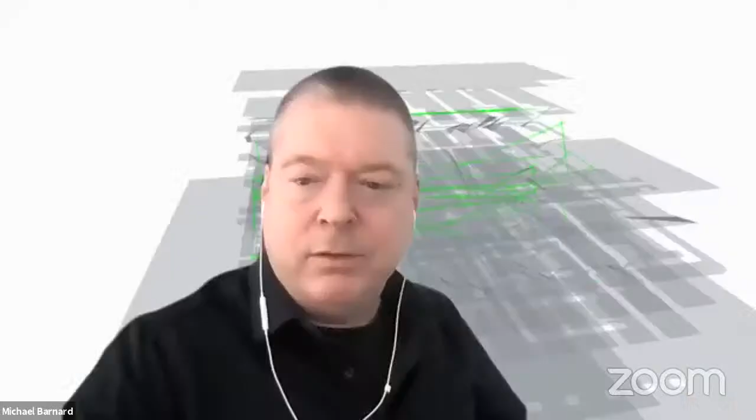Okay, so I expect you'll have something to say to each other, but let's start off with the hardware first, shall we? Look at the construction materials, and if we drift over to the social side, that's okay with me. I'm a sociologist. Can I start with sharing a screen to set a thesis? Sure, okay. Just find the screen, there it is. Paul and I'll go back with different pictures.

Part of my thing is that I came from this, which is the British Columbia efficiency in new buildings space. I was looking at this a couple of years ago at a conference, people were presenting on it, and I had an allergic reaction to it, specifically the net zero new construction. The principle of net zero at the time, and this is a geographical perspective and also a legacy perspective. The first perspective is that I live in the lower mainland of British Columbia, which has some of the worst solar power generation capability on new buildings in the world.

We just aren't a great place to put solar on rooftops. Because you get too much rain. It's rains and clouds, and we're moderately far north, so it just cuts down on the amount of sunshine that we can use to generate electricity. Right. And net...

Net zero implies that not only do you have a passive home, or a passive building, but you're generating the electricity on site. And I don't think that makes a lot of sense. And more to the point, I think it makes very little sense outside of suburban sprawl models. I'm strongly an urbanist. I'm strongly for more urban density.

And it doesn't make sense to try and generate all the electricity a city uses, all the energy a city uses, in the confines of that city, when cities take up less than 2% of the land mass of the world. Wind farms interspersed with farmland, just fine. Solar utility scale farms can be put on non-arable land, just fine. It doesn't make sense for me to generate electricity locally.

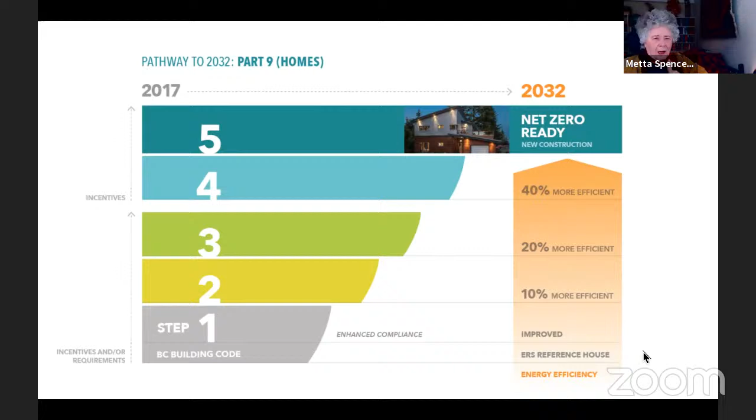Let me get my head clear. When you're talking about efficiency, you're distinguishing that from what? Efficiency to me means anything that saves energy. But you're distinguishing efficiency from what? No, I'm saying that a lot of our efforts, and this chart is very focused on building efficiency, of making passive buildings that require less energy to heat and cool.

Right. And I'm saying that if the energy that's used is very, very low carbon, and it's being used in electrical appliances, building efficiency doesn't matter. Tenant comfort and economics matter, but it stops being a climate argument and starts being an economic and tenant comfort argument. All right. Okay. Next, just two more points in the thesis.

That means that in new buildings, what we care about is embodied carbon more than building efficiency, in my opinion. Embodied carbon: cement is 8% to 10% of our total global greenhouse gas emissions. Sand mined for cement aggregate is the single biggest mining process in the world. And that means that the cement used in standard cement buildings, especially multi-story buildings, is actually one of the biggest carbon debts that's impossible to repay for buildings. And so that's where my focus is. So engineered hardwood construction, which Canada is a leader in, along with Scandinavia, is one of my key focus areas.

The last point I make is that means we have to pay it. I'm very concerned about the legacy of existing building stock. We have a lot more buildings that are already built than we're building new. And so I'm very concerned about what we do with the buildings that we already have, and about making sure the buildings we build have no carbon debt.

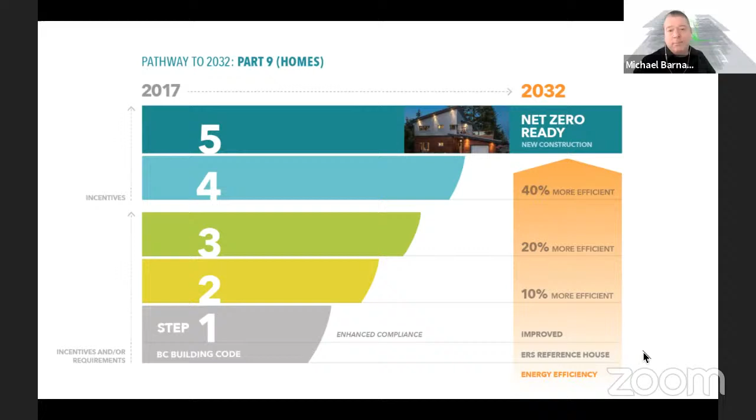So that's my thesis. It was triggered by this. I published a series of articles on that. It led to a bunch of discussion, and it had some changes. We'll talk more about some of these other slides, but I think that's my thesis. That's where I wanted to start the conversation with Paul. And I've given him lots of room to react to. Good. Okay. Are you guys going to go toe to toe, or do you agree already?

Well, thank you so much for launching that thesis, Michael. And I think we will thoroughly disappoint the viewers and listeners in that we're not going to have an argument on this. I am 110% in agreement with you on this. So let's see if I can just share a slide to talk around a little bit.

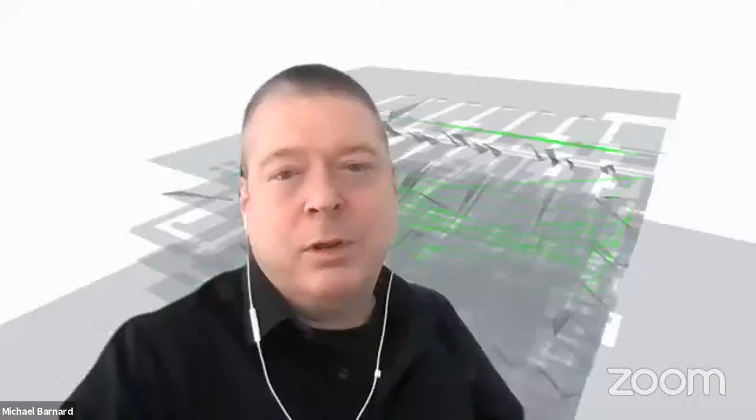Yeah, certainly one of the things I'm looking forward to is getting more nuance around some of these points. Paul is a professional who spends his time in exactly this domain. I skim across the surface and go deep with my nerdy knowledge into domains, but I'm not an expert like Paul is in this space.

Come on, you can do it. I know you can. You know, the blessing of this is, I think it's emerged behind it in your preview as opposed to in mail. So it would open up in a different application. So I think you want to close that down and find the other window to share. Okay, are you seeing that now? Nope. Okay. You might want to stop sharing and share your entire screen. That would be a simple way to do it. I'll do that. You know, the blessing of Zoom is, although this is going live and a few people will be watching it now, the nice thing is I can edit out anything where we have to waste time like this. All right, terrific.

Okay. So to build around your thesis there, Michael, you are absolutely right. Although this new house looks very typically suburban, it's got all those things against what you were just speaking about. It's not urban. It is a large house on a large suburban lot. And it's proudly displaying that it's got an 87% energy reduction. This is a project that my firm completed a couple of years ago.

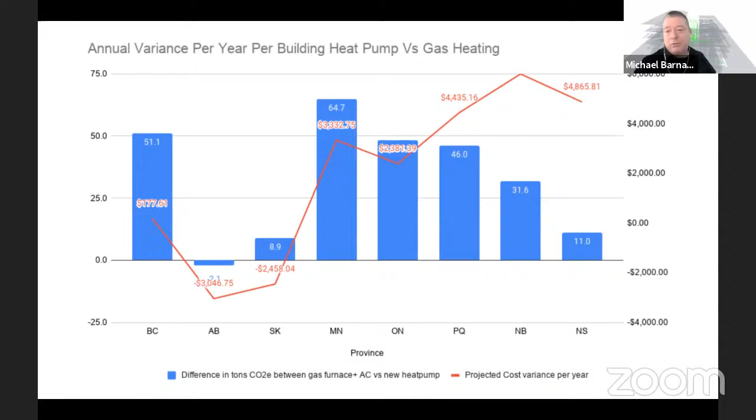As you can see from this chart, even at 2016 grid emissions, with the 2030 carbon price, there's no fiscal case for keeping your gas furnace. You want to get rid of that operational cost and transition to an air source heat pump as soon as possible. And then we save a whole bunch of money.

And so we want to decarbonize everything. The best way to decarbonize everything, that's heat pumps. That's the right choice there. But the building owners are incented fiscally by efficiency, not to put in heat pumps. So we have a gap that we have to bridge. And that's a fundamental policy challenge, which is why I'm pushing this as much as I can from my small position of whatever influence I have as an author, to assert that our policy should shift.

You got to make me smart now. I'm not going to let you go past where I can sort of follow you, but I don't understand why, unless you're saying that some heat pumps are not actually using electricity.

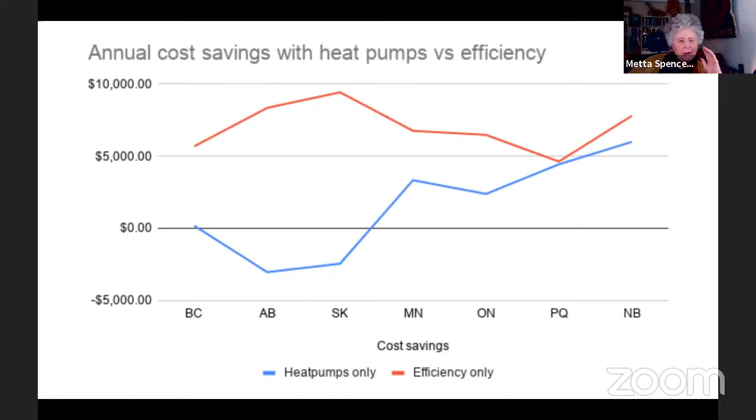Correct. This is the operational cost view, not the transformational cost view. Paul lives in the transformational cost view and has to project the operational cost view. This is the operational cost view. And to be clear, homeowners are weird because they're individuals. They make irrational decisions more often than businesses, because businesses spend more time in spreadsheets.

And so, Kahneman talks about system 1 and system 2 thinking. Most decisions by most homeowners are made in fast system 1 thinking. Most decisions by businesses are pushed into slower, more methodical system 2 thinking. And so, I'm a spreadsheet junkie. I force my brain into system 2 all the time, but I'm irrational as well.

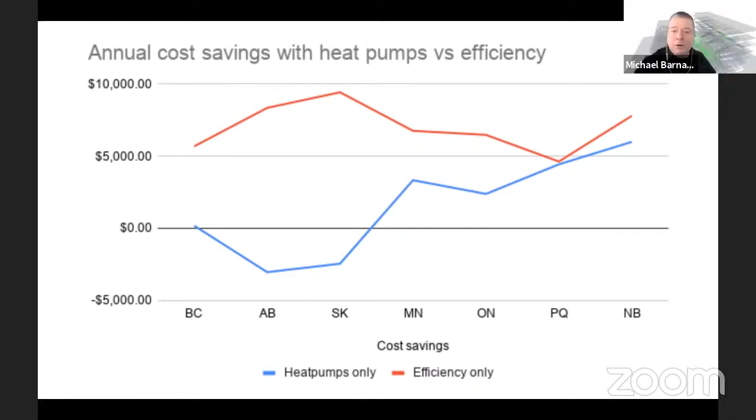Paul, I'm going to stop sharing because I think I've shared enough. What's your perspective on those incentive thoughts and the funding thoughts and the operational versus transformative cost thoughts? Yeah, thanks so much, Michael.

So here in Toronto, Ontario, we are a few steps behind Vancouver, BC. Yes, we have declared a climate emergency, but we haven't put in place any of the other things that Vancouver and BC have put in place. Toronto City Hall is looking through a program called TransformTO at the methods that they would use, and we're looking very closely at Vancouver.

Whether the provincial government of Ontario is looking at anything is an open question. So I'll just leave that alone for the moment. I won't. They canceled the efficiency program at the provincial level as one of their first activities upon entering office, along with 758 renewables contracts.

Paul has to live in that province. I can be a gadfly. You can be a gadfly. Thank you for bringing that up.

You're absolutely correct. And so that's the climate that we're working in here in Ontario. As an individual, I want to do things.

Most of the people that I connect with here in my neighborhood called the Pocket, which is a piece of Riverdale. I know Mr. Hanson very well. Yeah, he's a neighbor. So that means you have to put up with his bicycling stuff even more than I do on Facebook. Yep, absolutely. And community meetings, et cetera, et cetera.

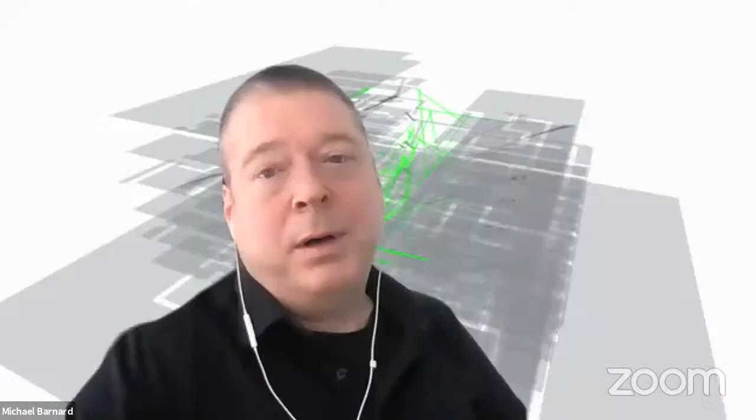Like, it'll take it from working good to working great. And even though I try to preach, seal up your building envelope, insulate it better first, then fuel switch, if you do it the other way around, so long as you do both, it doesn't matter the order you do them in. But to be clear, if you do the fuel switch first, you start saving the carbon emissions incredibly rapidly. Exactly. Yeah.

And I do want to disambiguate one thing. We keep talking about air source heat pumps because there's also water source and ground source heat pumps. So, down in downtown Toronto, they have the deep lake water cooling system. Yeah, what's the name of that company again? Enwave. Enwave, thank you. It slipped my mind. I'm much better with remembering numbers than I am with names. Not a problem. But Enwave runs a pipe into Lake Ontario, a few dozens or 100 feet down, where the water is always the same temperature.

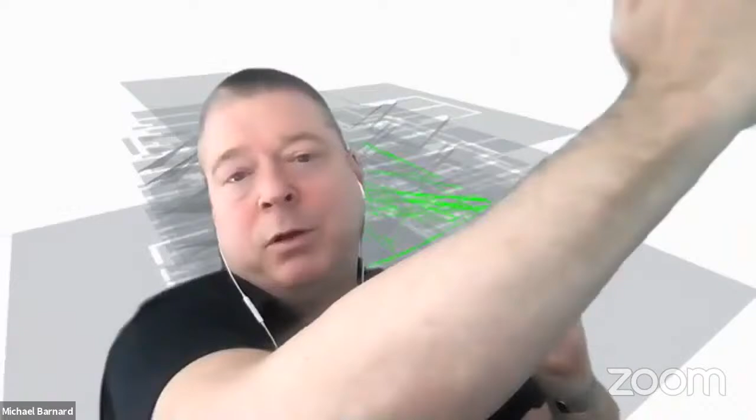And all a heat pump does is it moves heat from one place to another based upon a differential. It's just like an air conditioner. As a matter of fact, it's incredibly similar to that. All an air conditioner does is move heat from inside your house to outside of your house. And so a heat pump is moving heat from outside of your house to inside of your house. And that coefficient of performance, that 3 times, means all you're doing is moving that heat. So you get 3 times as much heating or cooling for the same electricity, instead of a baseboard heater where you get 1 unit of heat for 1 unit of electricity.

Okay, let me see if I'm getting it. So there are 2 factors involved. One is you're switching from gas, fossil fuel, to electricity, which is presumably better. I mean, I have questions about things like... It depends which province you're in. But okay. So theoretically, when you switch to a heat pump, you're switching to electricity, which, let's say, is better, although I don't know whether it's always better. But then the other thing is the heat pump itself as a mechanism is more efficient than baseboard heaters, for example. Okay, so you're getting two sources of improvement with this heat pump. Does it matter whether it's from water or air?

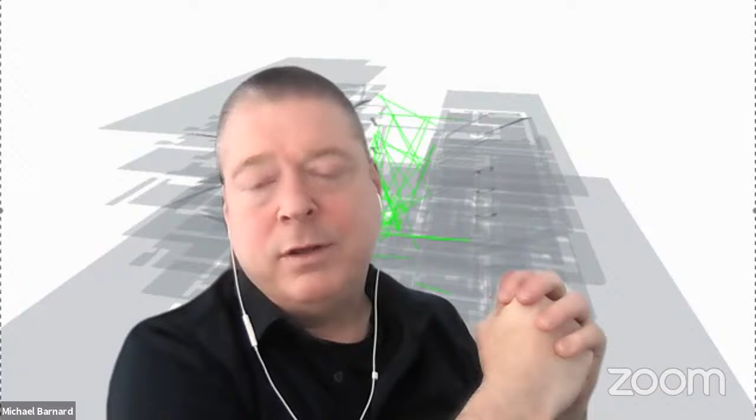It does, for 2 reasons. It works better with less temperature difference, and so when it's really cold outside, the heat pump struggles more to extract the lower degree of heat to bring it in. Now in Toronto, it's not a problem. In the prairies, it's more of a problem. But to Paul's point about the house he pointed out, they're doing capture of the dryer vent heat. And it's also possible to capture the heat off of the water that flows out of the house.

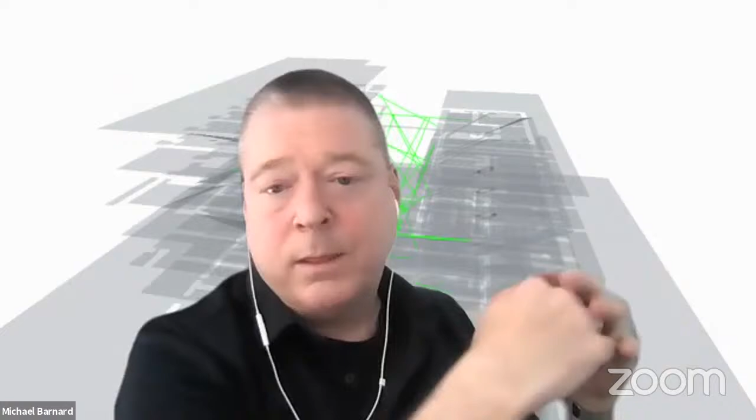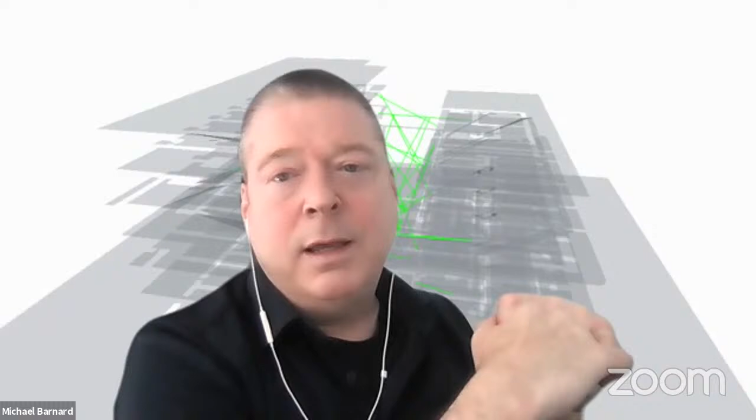Here in British Columbia, in Vancouver, Olympic Village, just 2 kilometers from where I live, master planned by Scot Hein, who Paul probably knows the name of. Urban planner in Vancouver for years, and coming out with a big book, by the way, Paul. So you probably want to look for Scott's book that's coming out. But Scot Hein, I was on a bike tour with him, and we were talking about the plant for district heating in Olympic Village.

What they do is all the water that flows out of the condos and apartments and social housing goes down into this heat reclamation facility, and they capture the heat using heat pumps, and then they push that heat back into the buildings to provide heat. So capturing the heat that we normally throw out through our doors, our windows, and our sewer pipes is a mechanism that immediately starts to enhance that. But those are follow-ons. Those are comfort features more than anything.

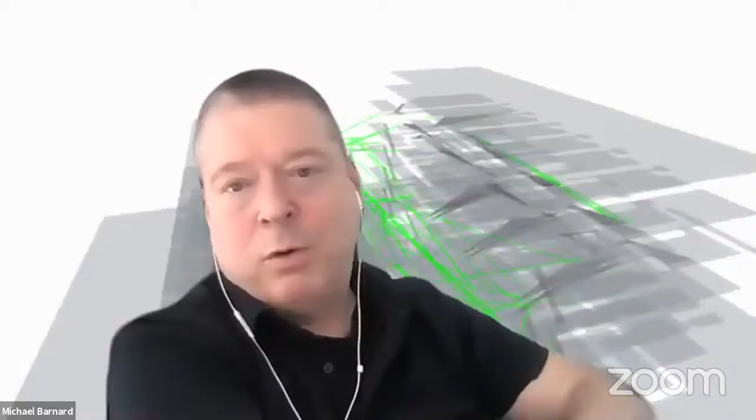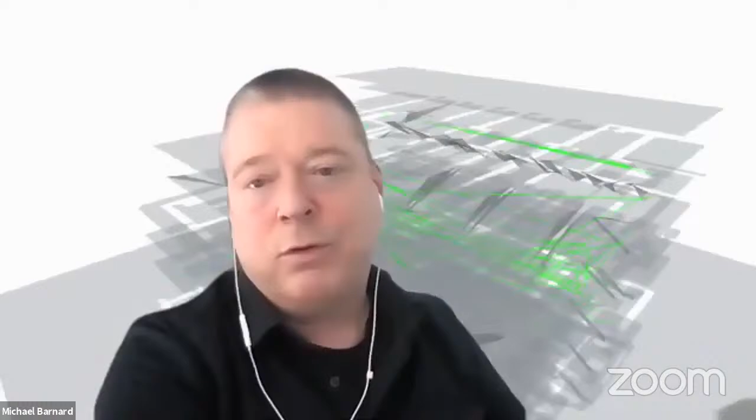I do want to add 1 point. So water source is easier if you've got a big water source. Ground source, you put in trenches and you put tubing in, or you drill down. And below 6 feet, the ground is always the same temperature, as long as you're not in permafrost land. And so you get greater differential. It's just more capital cost to put in those systems. Air source makes much more sense for residential. The bigger the building, the more likely it is that ground source or water source heat pumps start to make sense.

There's a building over on the other side of Spadina, Paul, the other side of Toronto, across from the old Globe and Mail building on that little street there with that amazing bistro. Serves an amazing cassoulet. I forget the name of it though, because I'm bad with names. There's a lot of amazing bistros over there. You're gonna have to narrow that down for me. I know. They used to be on Queen Street, but then they moved down.

I'm also wondering which side of town you're talking about, because the Globe and Mail moved and they tore down their old building. So if you're out of date, I don't know which side of town. The old location, I think it's a building on Wellington Street.

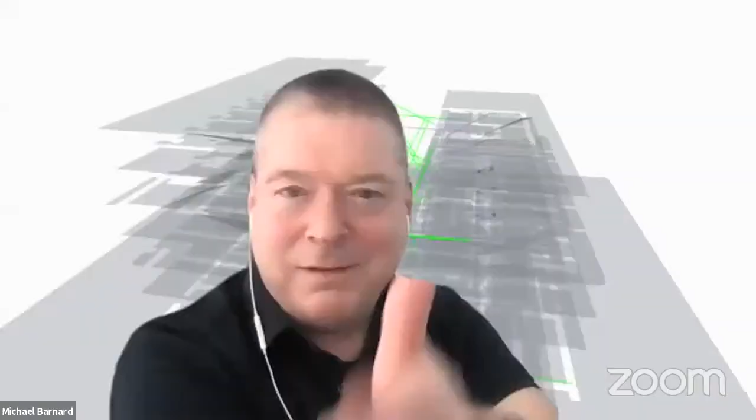Wellington, that's it. So there's a luxury residential building of 8 stories, 12 stories, and it's ground source heat pump heated and cooled. So they've done that piece.

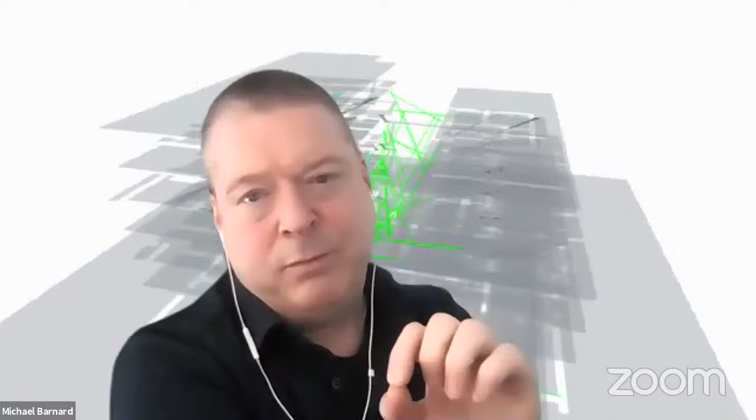Last point I want to make though is Paul was talking about it's always better to do those other things. One of the things I did was a really interesting assessment for Canada specifically of taking the worst 10% of our commercial buildings. We've got about 50,000 commercial buildings, and the average commercial building is about 5,000 square feet. They're not big, right? And so I'm going to make some assumptions about that average commercial building, that 10% of the worst ones.

They leak, they have big holes, lots of draft, they're run on gas furnaces, and where they have air conditioning, it's rattle trap, old, highly leaky air conditioners. What if we just took the bottom 10% of those commercial buildings and did nothing but put heat pumps in? You'd probably get the same comfort for the people in the building, because leaky buildings have comfort and draft problems regardless.

But what I found was just doing that intervention on that small set of 5,000 buildings across Canada would achieve 1% of our total greenhouse gas emissions reduction targets for Canada for 2030. Just one intervention on the worst small commercial buildings. So this is a big deal, right? We have to get the policy right. Make a legal intervention, or something more than just saying you'll save money. Could you do something like, damn it, you got to do this?

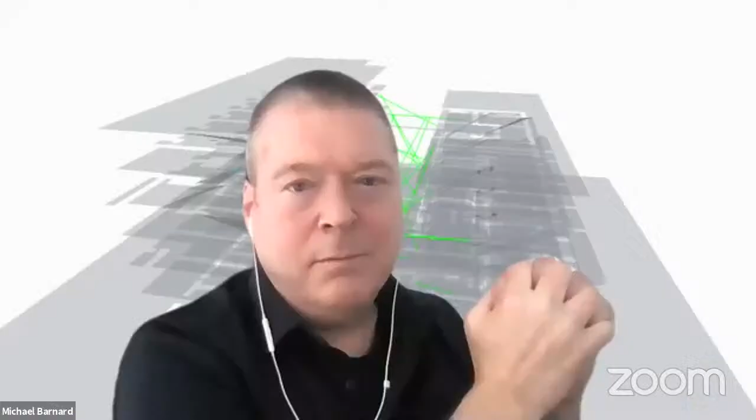Look, we don't have that much time, and I want to cover two different topics. I want you to explain cement to me more, concrete. You've convinced me that it's important, but we haven't really touched on it. I don't understand what's so bad about concrete, and what the opportunities are to stop making it such a terrible thing. Is there any way to make good cement? I've published on this, read the literature, and talked to experts. So I'll start, and Paul will undoubtedly have some add-ons.

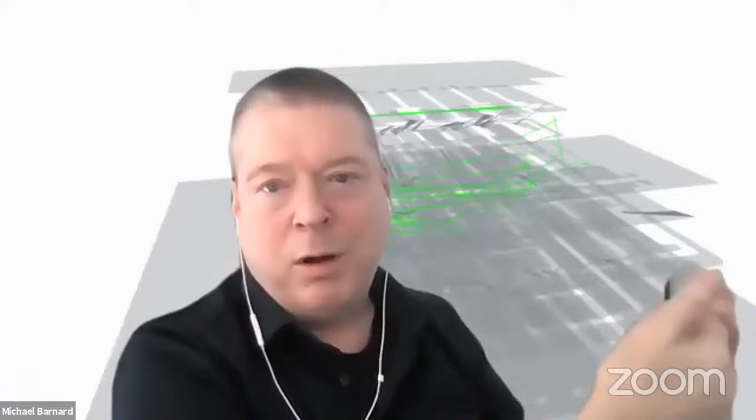So reinforced concrete has been a tremendous boon to the world in terms of the architectural forms it enables us to create, and the buildings we can create to do new and amazing things. I love mid-century architecture buildings. They weren't possible without engineered concrete for the most part.

This is not being against cement or concrete. This is saying we have to reduce our use of it, and we have to make it better. But cement itself, concrete is cement plus aggregate plus water. You mix them together, you spread them out, and then they cure. And that's how that works, it's a process where they set.

And many of us have seen that, and seen people who've put their feet in cement before it's cured, and then you get this footprint preserved. Most recent funny one I saw was a bunch of ducks walked across the cement before it set. So there's duck prints forever embodied in the concrete.

But cement and the aggregate are significant problems. The cement itself is a combination of clay and quicklime and a couple of other things. And the way they get quicklime is really interesting. They dig up limestone in massive limestone quarries. They truck it to a cement plant. They crush it. They put it in a cement kiln.

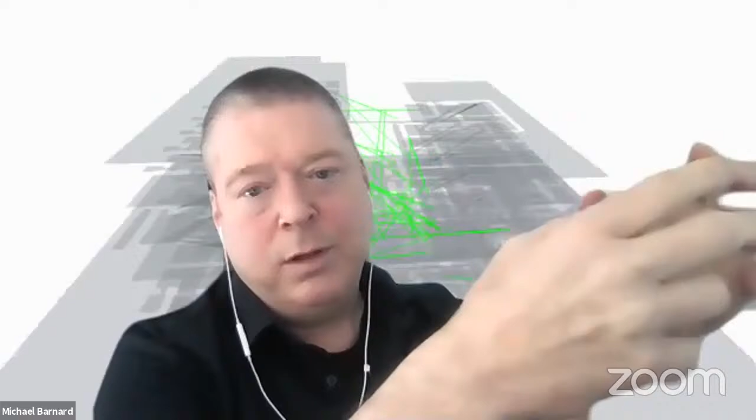So that's a bunch of diesel that's used for digging it up, a bunch of diesel that's used for transporting it. The cement kiln is fired typically by natural gas. So lots of fossil fuels used to heat up the limestone. The limestone then emits, as a chemical process when introduced to heat, CO2. Lots of CO2 bakes off of the limestone as it turns into quicklime. So you've got the natural gas emitting CO2, you've got the limestone emitting CO2 as it turns into quicklime.

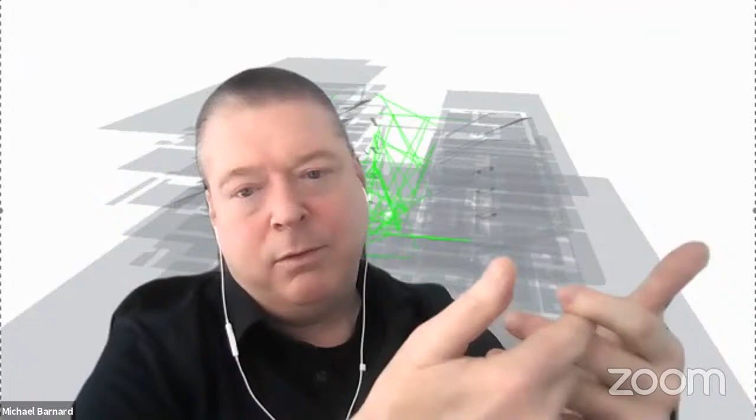Then you put the clay and the quicklime in this cement kiln, the rotating 130-meter drum with a 30-foot jet of natural gas blowing up through the middle of it, and you rotate it to tumble the quicklime and the clay together to create clinker and cement. And you take that out and you crush it into powder and you put it into these very heavy sacks. And then you distribute the sacks using diesel trucks to building sites.

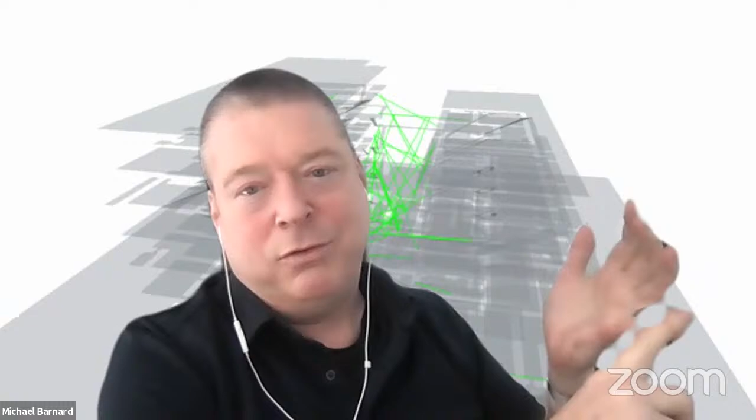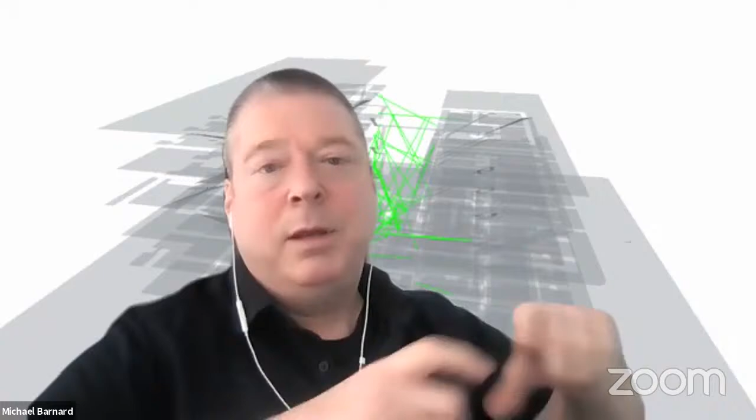And so what you've got is lots of emissions from all the mining, distribution, quicklime, cement kiln, distribution, and a bunch of those can be diminished. Electric trucks and electric mining equipment, both of which are present and emerging and are going to be dominant, eliminate most of the mining and distribution concerns. We can do electric heat for the cement kilns.

We used to have one in Nova Scotia, I think it was, or New Brunswick or Newfoundland, one of the ends out in the Maritimes. We used to actually have an electric cement plant. We can actually have sources of heat, so we don't burn the natural gas. But when we bake, we still don't have a replacement for quicklime that's low CO2. We have to do something about that right now.

And then there's the aggregate. Remember I mentioned the biggest thing we mine is sand and aggregate for cement. It's the single biggest mined product in the world. There's 50 billion tons a year, I think is the number. It's just absurd. And all of that has a CO2 footprint as well. And so we have to do something about the aggregate. We have to do something about the cement. We have to capture the CO2 that comes off the quicklime. It's non-trivial and it's in everything.

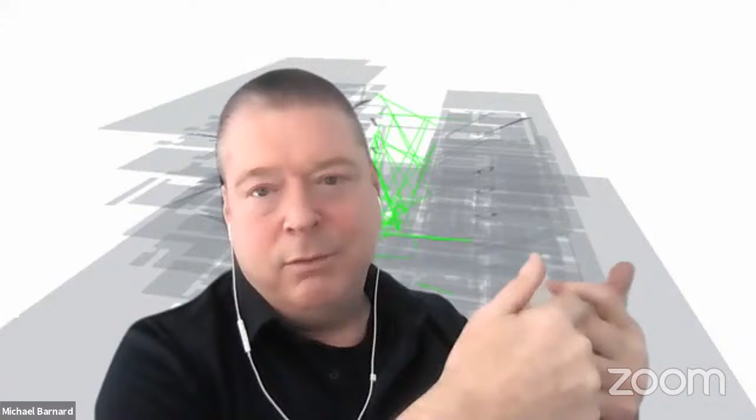If you look out your windows, to Paul's point, the foundations are cement, our sidewalks are cement, most of the tall buildings are cement, the overpass down on the waterfront that's blocking your view of the lake is cement, right? It's everywhere. It's the gray glue that holds our society together. And you can replace a fraction of the sources of CO2 in this whole thing. You can decarbonize a whole bunch of it. It's non-trivial to get to the last.

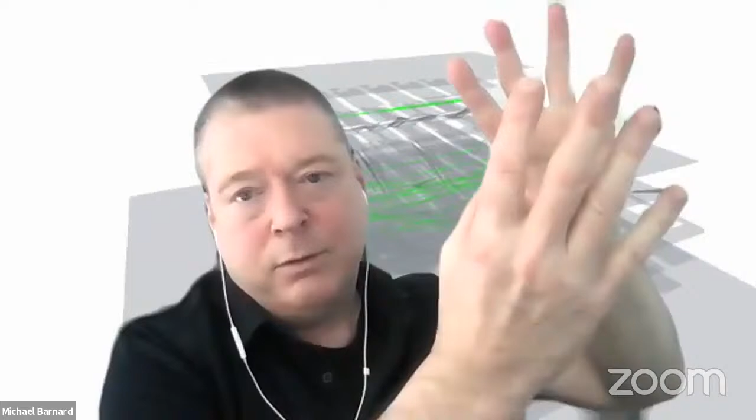That's one of the few places I say we'll probably still need carbon capture and sequestration, on the CO2 that comes off the lime kiln. Everything else we can decarbonize in that process, but the CO2 that comes off the limestone in the lime kiln as it turns into quicklime, that stuff we have to capture and sequester or do something with. It's still a lot. You're suggesting capturing it right at source rather than counting on trees to do it for you? Correct. This is one of the at-source emissions things we have to fix.

Okay. Well, I don't know whether to be happy or sad. It sounds like you made a little progress, but I'm not too clear.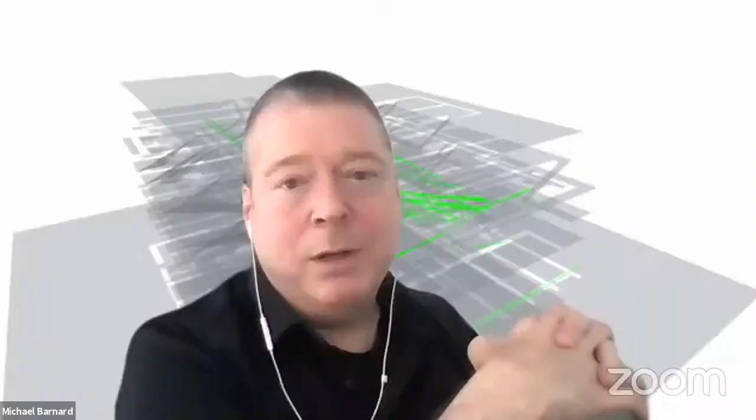No, I know we know what we need to do. We know what we need to do, but it's really hard to get it done. Yeah, but Paul once had a wonderful conversation about mass timber. So I've been convinced by that, although I remain ambivalent a little bit. Go on, Paul. Are you still on to mass timber as the best solution or not?

It's certainly a very good solution at the moment. It certainly replaces a lot of that above grade concrete. And personally, if I had to work in an office and I was surrounded by wood versus surrounded by concrete, I'd be a lot happier in a wood office. So to nuance a little bit that great description that Michael gave of the production of concrete, he's absolutely right. Concrete in and of itself is not the problem.

It is the production of the component parts and the actual component part of the quicklime. Those are the problems. So we can deal with the production issues mostly by electrifying what is currently done with fossil fuels. And again, back to Michael's earlier point, it then depends what province you're in, how good that fuel switch issue is. Much better in Quebec than it is in Alberta. So if we were electrifying things in Alberta, we'd still be putting out a lot of greenhouse gas emissions just for the production of the electricity.

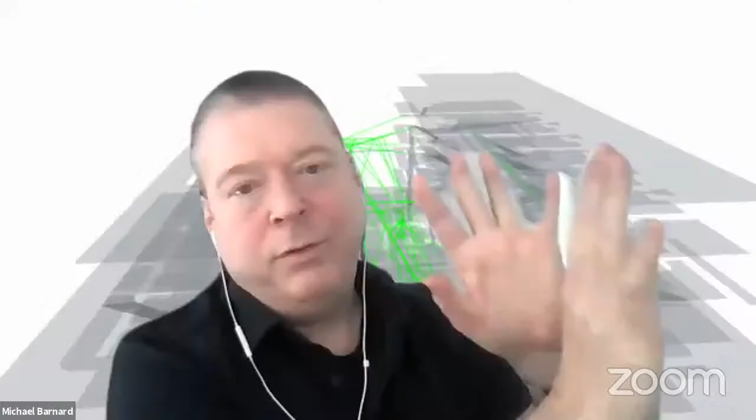But all grids are decarbonizing. So anything we electrify gets more virtuous over time. Gets better over time. Exactly. So it is the North Star to aim to. Absolutely. And there are a number of very clever engineers who are now working on ways to replace that quicklime. One of the early out of the gate solutions was using fly ash, and basically they scrape down the inside of a chimney from a steel smelter.

Okay, but to produce more of that, we have to smelt more steel. Maybe not driving in the right direction. Good thought, but maybe not encouraging the right behavior. Now, okay, we could smelt steel using electricity, but then oddly enough, we don't get the fly ash. So that avenue petered out a little bit. There are other companies around the world that are looking at different replacements. They're even going back to, hey, what did the Romans use? Because the Romans didn't use quicklime. The Romans used volcanic ash.

Well, that was great for the Romans because they had that big volcano just outside Naples. So that worked for the Romans. But we don't have enough volcanoes with enough volcanic ash to satisfy our hunger for the amount of concrete we need to produce. And I'm not suggesting that we encourage more volcanic eruptions. I don't think that's going to push us in the right direction of lack of greenhouse gas emissions either. Those volcanoes spew out quite a bit of greenhouse gas emissions all on their own. So that's also not driving us in the right direction.